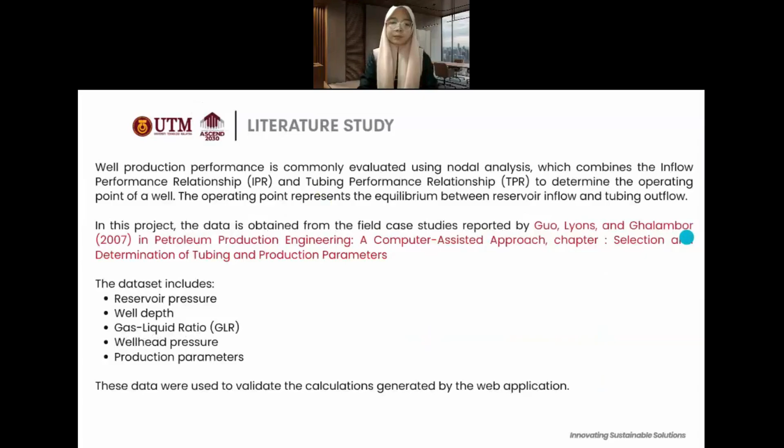To evaluate well performance, we use nodal analysis. This technique measures the reservoir delivery capacity, which is the Inflow Performance Relationship (IPR), with the wellbore lifting capacity and the Tubing Performance Relationship (TPR), to determine the well's optimum operating point. This operating point represents the equilibrium of flow rate and bottom hole pressure.

Our framework is drawn directly from well-established case studies in petroleum production engineering by Boyun Guo, William Lyons, and Ali Ghalambor, published in 2007. The validated dataset extracted from this literature contains critical operating parameters.

This includes the reservoir pressure, well depth, gas liquid ratio, and wellhead pressure. These combined data elements define the mechanical limits of the well system. This data is used to validate the calculations generated by the web application.

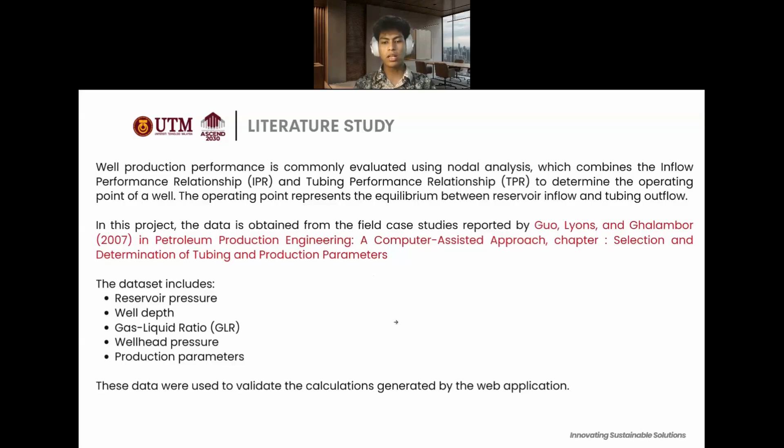Today, I will go through our flowchart for evaluating the well production performance. The systematic workflow allows us to perform the nodal analysis by integrating the reservoir deliverability with wellbore hydraulics to determine the optimum operating point of the well.

So starting with phase 1, we begin the process by collecting the input reservoir data such as the reservoir pressure, test flow rate, and the bottom hole flowing pressure.

So we require this data to calculate the productivity index, the PI. The PI represents the well's ability to deliver fluids and is calculated as the test flow rate divided by the drawdown pressure. Once we obtain the PI, we calculate the maximum flow rate, the Qmax.

This theoretical absolute open flow potential occurs when the flowing bottom hole pressure drops to zero, and it's calculated by multiplying the PI by the static reservoir pressure.

Next we generate flow rate values ranging from 0 up to the calculated Qmax, and calculate the corresponding PWF using the straight line PI relationship, where PWF equals PR minus Q divided by the PI. Plotting these coordinates allows us to generate the inflow performance relationship, IPR, using the PI method, visualizing how the reservoir delivers fluid to the wellbore.

Now that the reservoir side is established, we shift focus to the wellbore lifting capacity. We include our VLP method parameters, which include the gas liquid ratio (GLR), tubing head pressure (THP), tubing depth, and the fixed tubing size of 2.875 inches.

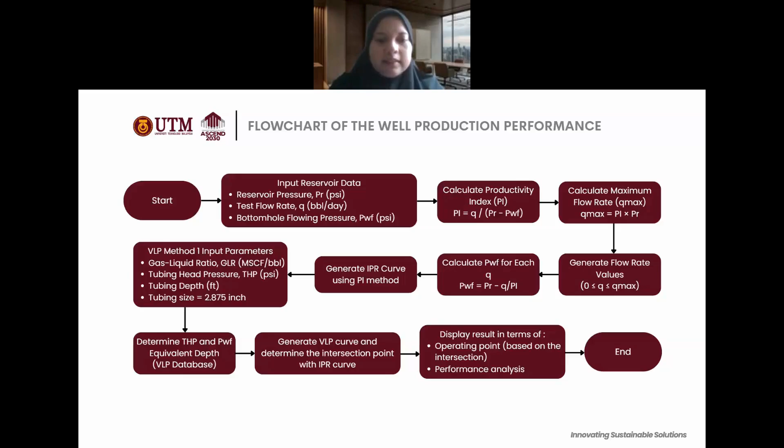All right, now we go to the field data. This is the data that we use to test our website, and this data we found from the case study of the Shen 77 well of the Liaohe Shenyang oil field. The reference for this data, as you can see below, is from the Advanced Well Completion Engineering third edition.

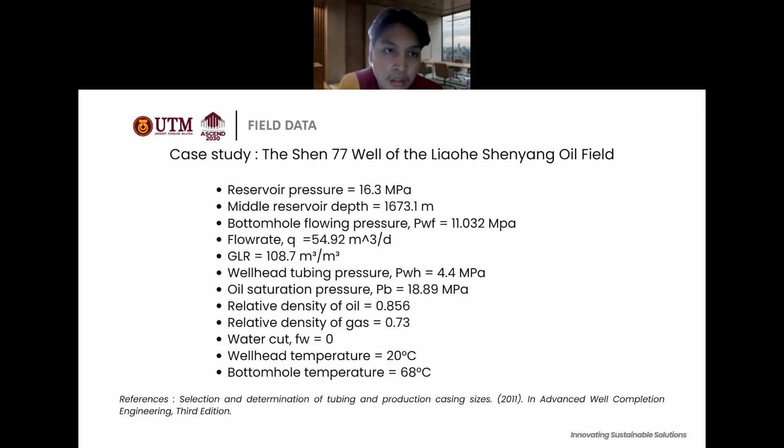So the specific data that we use to test our website is the reservoir pressure, reservoir depth, bottom hole flowing pressure, the flow rate, the GLR, and the wellhead tubing pressure. For the tubing size, our website only focuses on 2.875 inches. The other additional data you can see here is just supplementary data that we found from the case study.

Now, before we plug in our data to test our website, we need to convert all the data into standard field units. So for pressure we use PSI, for GLR we use MCF/BBL, for depth we use feet, and for flow rate we use barrels per day.

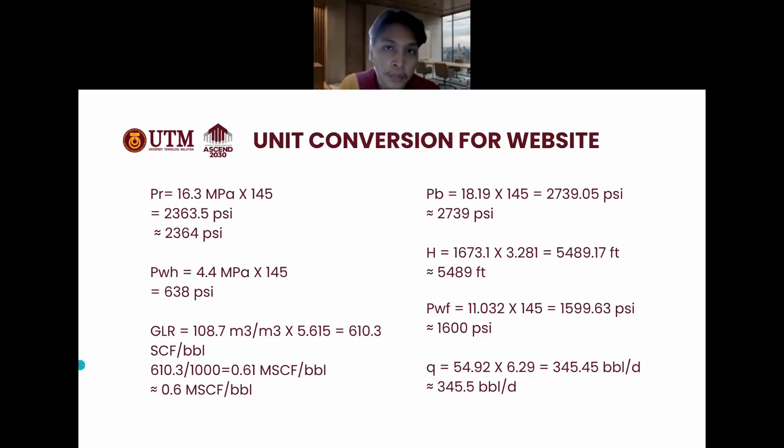After understanding the production data of the Shen 77 well and converting it into field units, the next step is to perform the engineering calculations and determine the operating point. Instead of carrying out these calculations manually every time, our team developed a web-based application that automates the entire process. The objective is to provide petroleum engineers with a faster, more convenient, and more friendly user platform for analyzing well production performance. Today, I will demonstrate how our application works using the actual production data of the Shen 77 well.

So this is the home page of our application. The application consists of two main calculation modules. The first is the IPR, inflow performance relationship, and the second is the vertical lift performance, or VLP. Together these two analyzers enable us to determine the operating point of the well.

So let us begin with the IPR calculation. For the IPR module, the application requires three input parameters. The first is the reservoir pressure. We will key in 2,364 psi, and press enter.

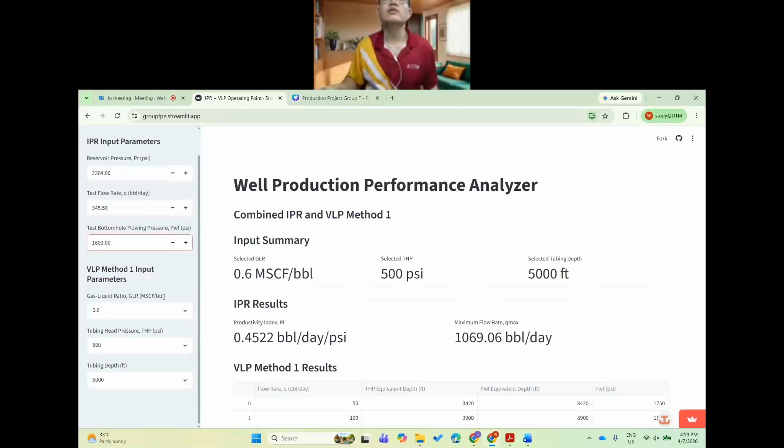So you can see here, this is our updated IPR curve shown in blue.

Next, we move to the vertical performance module. Unlike the IPR calculation, the VLP analysis considers the pressure losses encountered while transporting fluids from the reservoir to the surface through the production tubing.

For this module, we first select the gas liquid ratio, where we will use 0.6. You can see here we have options starting from 0.0 until 0.8, with the unit in 1000 SCF per barrel. So we will choose 0.6.

Next we choose the tubing head pressure for the Shen 77 well. The reported value is 638 psi. However, the Gilbert chart currently implemented in our application provides pressure data at 500 psi intervals, starting from 500 psi until 2500 psi. So for this demonstration, we use the nearest available value of 500, and click on it.

Next, we select the tubing depth. The actual well depth is 5,489 feet, while the current version of our database supports values up to 5,000 feet only. So we will use the closest available depth of 5,000 feet for this analysis. You can see there are several options for the user to select: 1,000, 2,000, 3,000, 4,000, and finally 5,000. So we click on it.

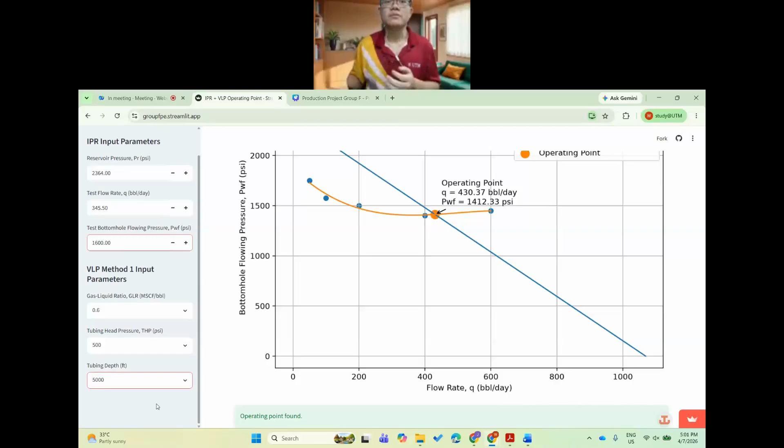The application will repeat the calculation for multiple production rates before generating the complete vertical lift performance curve. You can see here the flow rates start from 50, 100, 200, 400, and finally 600. These five flow rates are the available flow rates in the Gilbert chart.

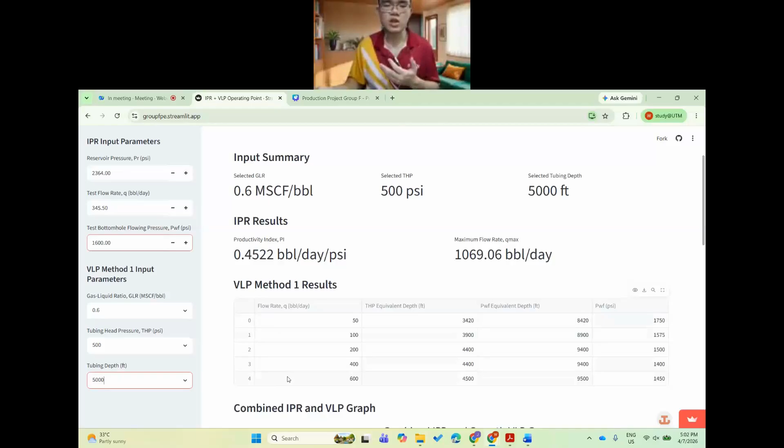Besides improving calculation speed, this application also serves as an educational tool. Students can clearly visualize how changes in reservoir pressure, tubing head pressure, the gas liquid ratio or GLR, and the tubing depth influence the operating point and ultimately affect well productivity. For practicing engineers, the application can also reduce repetitive manual calculations during preliminary production performance analysis.

Like any engineering software, the current version has several limitations. At present, the VLP database supports tubing head pressures at 500 psi intervals and tubing depths up to 5,000 feet. Consequently, the Shen 77 well requires the nearest available values rather than exact field measurements. Future improvement will incorporate interpolation techniques and a more comprehensive Gilbert chart database, allowing the application to represent real field conditions with greater accuracy.

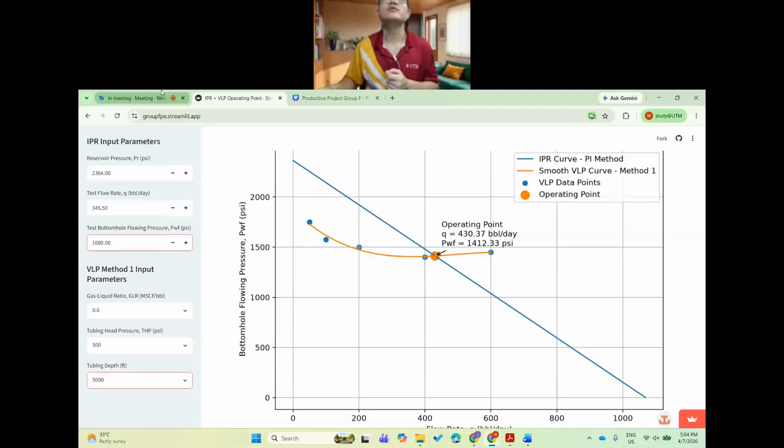In summary, our web application successfully integrates the productivity index method with the VLP method into a single user-friendly platform. By combining engineering principles with software development, it enables users to rapidly evaluate well performance and determine the operating point using real production data. So I want to thank you for your time and attention.